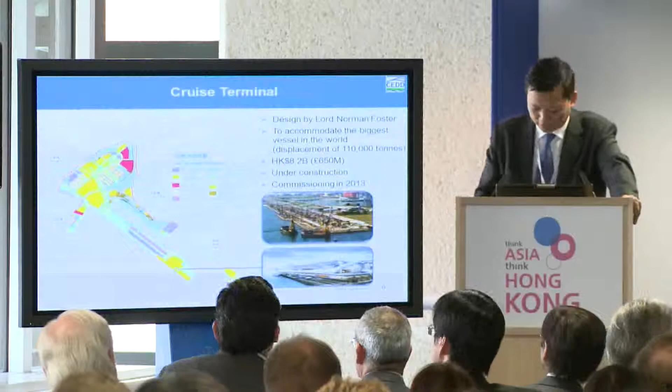The cruise terminal building is costing us about £650 million, and the construction is now going well. For the stadium complex, under planning as near to Olympic-sized stadium, with other facilities like the secondary stadium and indoor arena.

It's occupying 20 hectares in site - not a small site. And the overall cost should be over £1.6 billion. Tentatively it is going to be completed in 2019.

But we are still studying its feasibility and the procurement methods.

For the hospitals, we are planning 3 major hospitals here, with the first to be constructed not far from now. We'll have the design and build tender next year, probably early next year.

It will be occupying about 2.2 hectares in site, and although we have only 470 beds, those bedrooms are extra large to accommodate not only the children, but probably their family in that hospital bedroom. The completion is tentatively 2016.

So from now until the tender period, please consider whether your expertise can contribute. And even when it's being constructed, I think the services and equipment supply will be very contributing to this project.

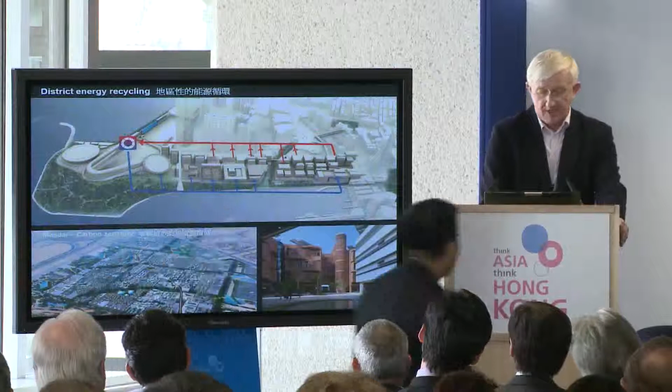We've done a lot of studies on the massing of the new cultural district to encourage air percolation through the site, and the whole idea of having a district energy system, as already touched upon, as part of the whole sustainable strategy.

If this were possible to achieve—and listening to the speaker just before me, I think it is possible—the idea is that waste could be recycled in an energy centre on the site, recycling waste not only in the cultural district but from the surrounding area.

And that would make a very sizable contribution to the sustainable agenda for the project. And that whole energy centre could be celebrated in the approach to the arena here as something that is visible and something to be proud of as part of the strategy.

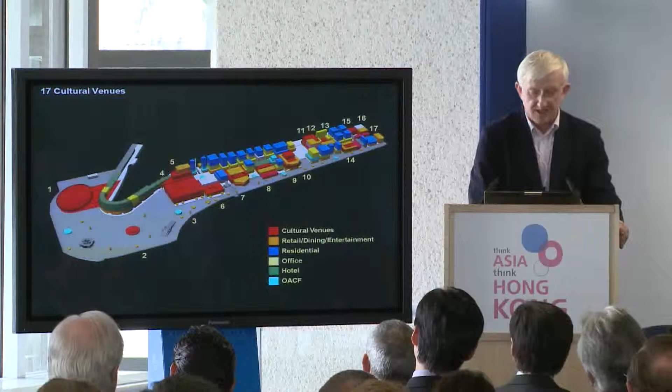I won't talk about all the 17 cultural venues, but all the red buildings shown on this diagram of the site indicate the spread of cultural buildings. Some are freestanding, but the vast majority are fully integrated into the urban fabric of the district.

Thank you very much. My talk today is titled Heritage Conservation Opportunities in Hong Kong.

Most of you will be familiar with the iconic, ever-changing skyline of Hong Kong, and you would have seen a few of those today. You would wonder - you'll probably never associate heritage conservation with Hong Kong, and you'll be right, it's a fair assumption. In the next 10 to 15 minutes, I'm not trying to convince you otherwise, but I'll use our experience of the last few years in Hong Kong as an example to illustrate that there are plenty of opportunities in Hong Kong. And like in our case, you'll probably find them in the most unlikely places.

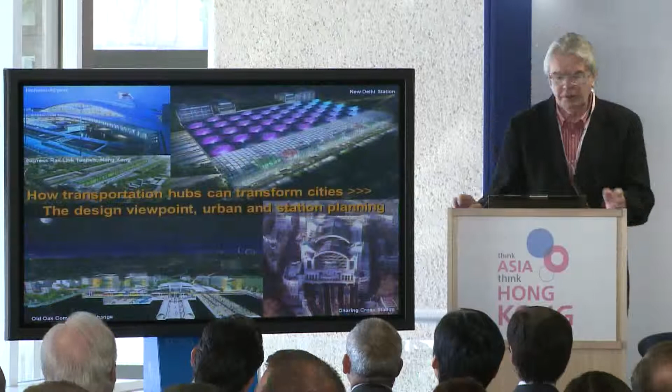It is an extraordinary story, and that is our prime interest in architecture—it's linked to city planning and to urban planning, to urbanism. City making and cities are very much the theme of what we have been doing and are doing.

We have two main offices, one in London, one in Hong Kong, and they're about equal, about 50 to 60 people at each. I like that we are balanced like that. It's a two-centred practice, and there's an interchange between the two, a feeding from the east to the west and vice versa.

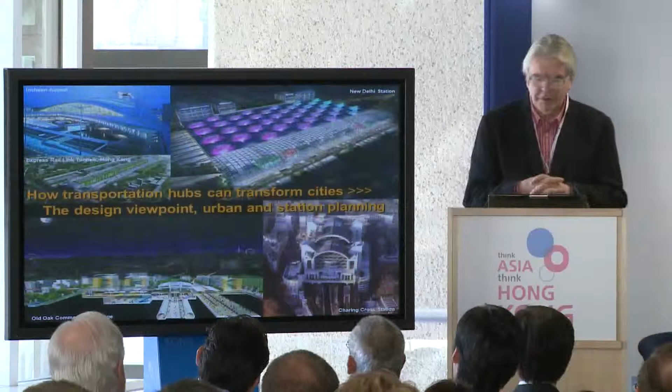We have done a lot of transportation buildings. The earliest was Embankment Place, Charing Cross, which was air rights, which led us to go to Hong Kong and do the Kowloon station. We're also doing other work in the region—we did the Incheon Airport, part of the main airport for Seoul. We're currently doing the new Delhi station, and we've been advising the government and local authorities here on the Old Oak Common interchange, so the feedback continues, as it were.

We are looking at the combination of Crossrail high speed for London.

The major project we began in Hong Kong, commissioned in 1991, has now been built out. It was planned to complete in 2014, but it finished this year—the Kowloon station and development. It's the relationship between a station that was very large and complex, part of the airport rail line, one of four major stations. We got the one I think is very suited to us—very three-dimensional, very complex, very urban, not a station in the standalone sense.

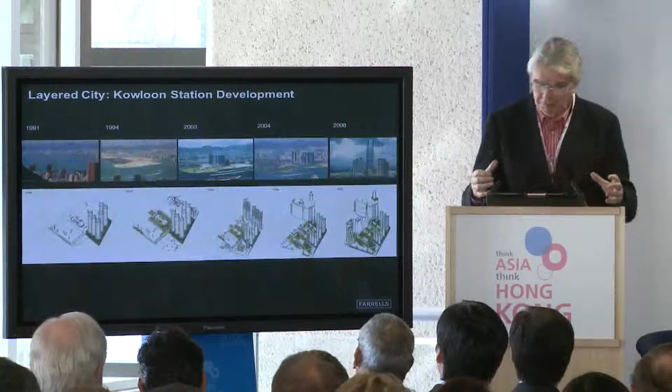This is a view of that development—these are all by different architects and developers. But in the core, in the middle of this, is the Kowloon station. This is a view of the three-dimensionality of that station below ground—you can see the various different lines, the shopping, and the large volumes, and how at ground level you just see an entry arch building, which also has the ventilation for what happens down below. This square is the very heart of the new district, with 14 million square feet, 3,000 or 4,000 apartments, the tallest building in Hong Kong, and various other buildings built in stages.

But underneath it, like an iceberg, is this complex that we designed and built, anticipating in its structure, function and services everything that was going to be built above it, in an extraordinary Rubik's cube. It's a model, I think, that's fascinating for all the developments now happening in China, and there are various lessons Hong Kong can take to China in a very successful way, particularly the relationship between transportation and urban planning.

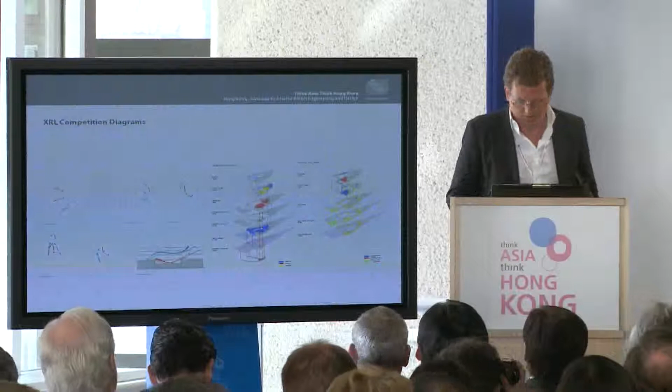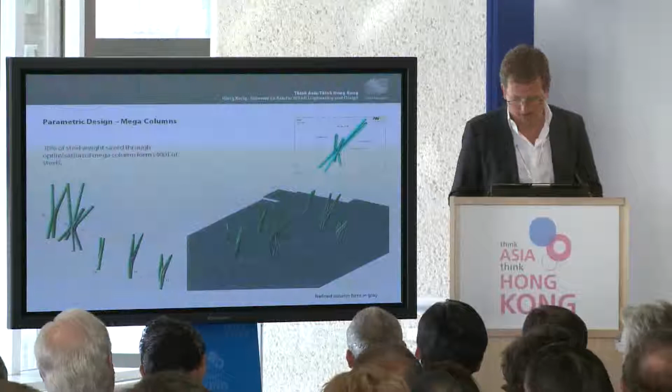And it's not just what we're providing here, or what the project was about, the interesting diagrams and the fact that it actually works rather well, but it is the complex roof that brought us into the project and made it such a stunning piece in that particular area as the terminus of the high-speed rail link. Our expertise here is our long-standing experience in complex structures that allowed us to optimize things, reduce the amount of material used, and nonetheless create the rather spectacular spaces of this terminal building.

But as I said, this project, winning this rather important competition, one of those mega projects in Hong Kong, allowed us to set up a Hong Kong office for Buro Happold as a startup, being an offspring of our London office, for various reasons.

But there are other factors, and it comes back a little bit to the sessions this morning. It is rather easy to set up in Hong Kong - somebody said it's easier than setting up in the UK. The legal system is very favourable, and the language, obviously English, gets you around. You have a pool of trained and skilled people you can tap into, and that's quite important to create the mix that's necessary - not just English, well I'm not English, but Europeans that go out and get the mix of the local and those brought in. It's got fantastic connections to all of Asia, so basically the world comes together in Hong Kong.

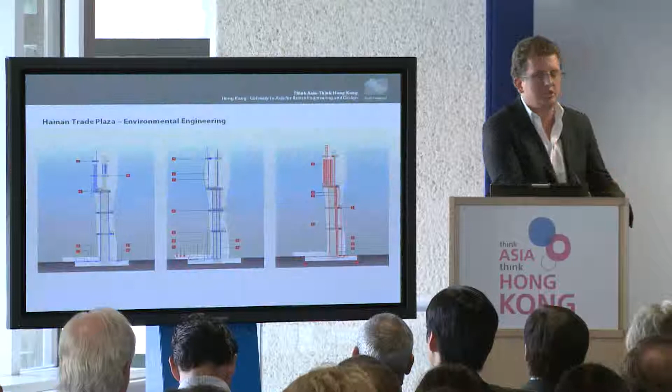Again, bringing together our expertise in structural engineering and our expertise in environmental engineering to have a credible scheme, because the first hurdle will be that this goes to the local engineer. He will check whether you actually fulfill the requirements, and we don't want to fall at that hurdle.

Similar theme: we try to enable the building shape to be built economically, but at the same time we link it into an environmental scheme that brings together the sustainability aspects and intelligent building service engineering.

And then the last two we are about to sign contracts for—we're on the verge of winning. The Jiangsu Grand Theatre was a project, a competition submitted in 2010, so it's been a long time in the making. A beautiful project, I feel, which blends extremely nicely into the landscape around the lakes of Nanjing.

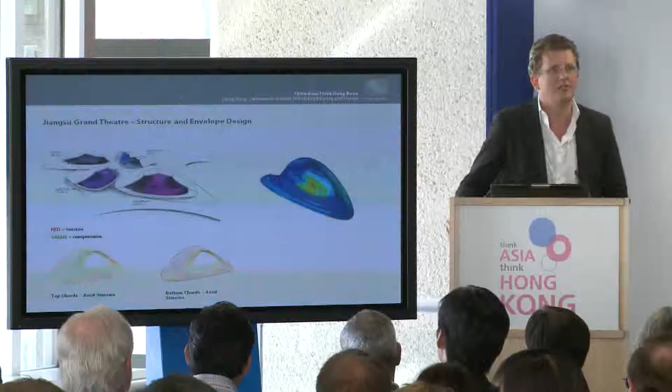And the interesting thing here was, while we were doing the competition, not long ago, we were asked in front of a committee of Chinese engineers who wanted to know how it all works, and that was a very interesting experience. Apparently we passed this test, so our presentation there has allowed this project to move on.

But again, it's not just about the structure and the shells that form the envelope to these operas and opera houses and theatres and so on, but it's the integration of the engineering parts with the architect and the individual engineering disciplines. And the last one—I hear from Zaha's that we have virtually signed the contracts for this—is the Nanjing Youth Olympic Center.

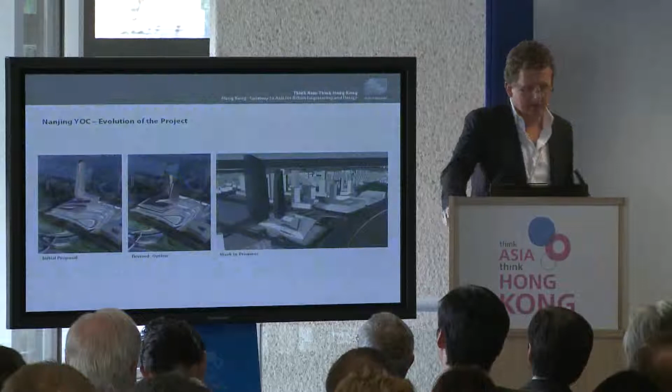It was again an international competition, for a couple of towers and a conference center, and we followed this with engineering schemes that backed up the designs by Zaha's. It went through various different iterations, both again on all sides of our engineering disciplines, and as I say, it went through various iterations from one tall tower to a twin tower solution.

And what you see on the right-hand side is a screenshot of work in progress. So we are working on the project.

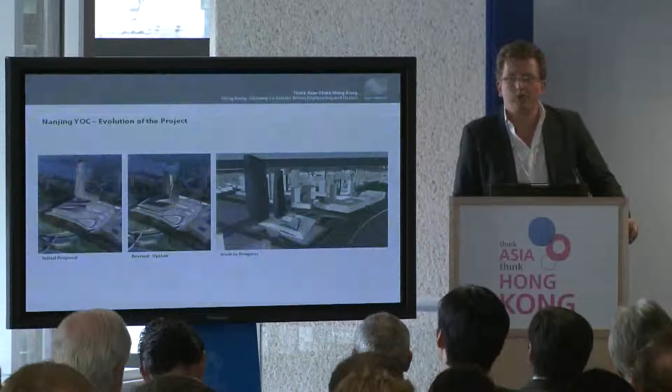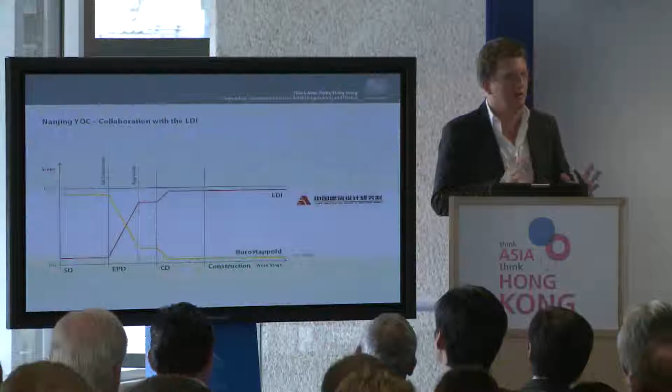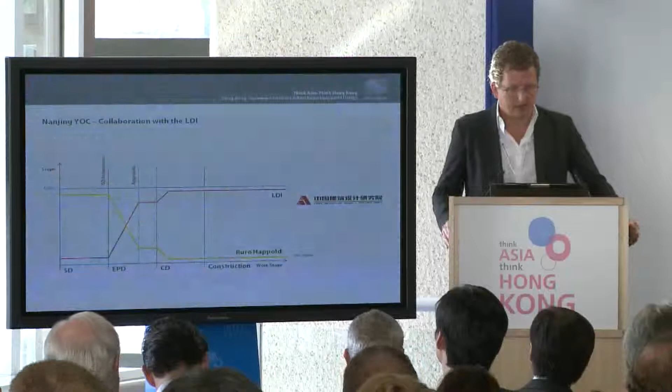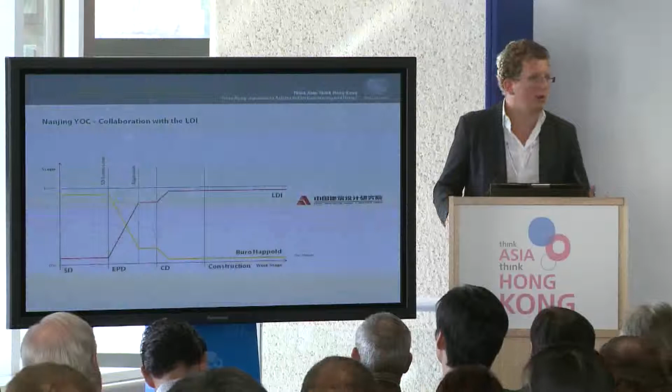An interesting factor here is that where we are used to, say in the Middle East, having our own office and working through all stages of the project—similarly in Hong Kong, where we have our own delivery office and we're doing the detailed design for projects like the XRL terminus station, the terminus building—in mainland China it's slightly different, because we have to work with a local design institute, at least in our case. And that means we have to structure our work, our input, in a way that we add most value and then hand it over in the best possible fashion to the LDIs.

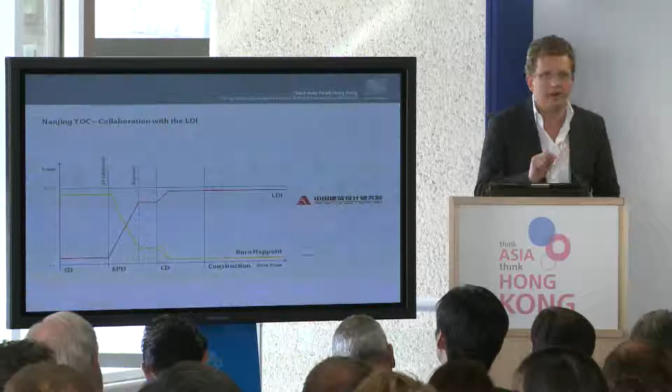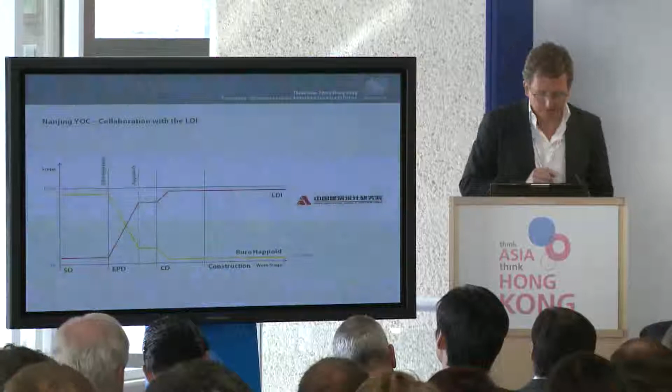And it's interesting because along the way, we have actually established working relationships with various rather large LDIs. I mean, they are all much larger than any one of us, in terms of architectural services or engineering services, and that's been a good learning curve over the past few years.

What's the future outlook? Having started this office in 2009 and now grown in Hong Kong to 45, I think it is, we're seeing this very much as a reverse in the future. We spread out into Hong Kong from the various design hubs. Hong Kong itself is a design hub, a center of design and creativity in Asia, and we see the arrow turning around—actually being inspired by Hong Kong, and Hong Kong spreading out into other parts of Southeast Asia and Asia.

That's part of it. The other part is obviously a more serious move into mainland China. We are in the process of setting up an office in Beijing—we're virtually there, but not quite yet. It's all the paperwork, so I understand this has been signed, and we're looking to further opportunities.

Maybe it's Beijing New Airport—we're working with Zaha Hadid as one of the shortlisted teams. I think Spencer, your team is also shortlisted. Yeah, we will see, but it's a bright future. We're very excited about it. Thank you.